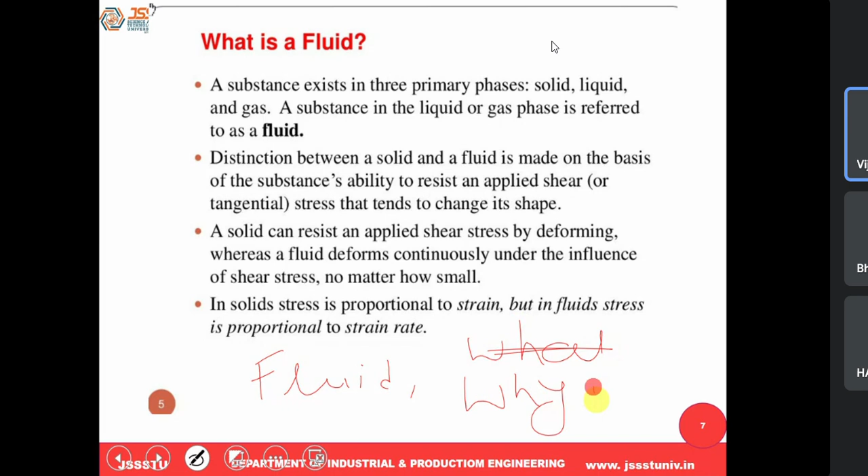The important questions: first, what is a fluid? And another very important interview question: why does fluid flow? To answer, let me take the answer from your side. Anyone, what is fluid?

Liquid and gas together, okay. But technically, you should answer like this: one which is having flow property is called a fluid. Whatever has movement, we call it fluid. This is the technically correct way you have to answer in an interview — one which has flow property, which is able to flow, that is called a fluid.

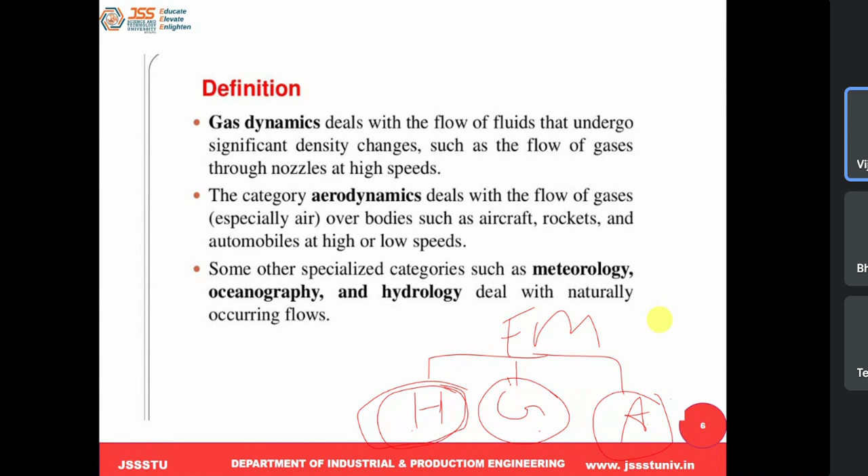Fluid means not only liquid, it also includes gas. We know every matter on earth is made up of three things: solid, liquid, and gas. The study of solid behavior is the subject called SOM, and the study of liquid as well as gas behavior is called the subject of fluid mechanics.

Now we are going to take this up in fluid mechanics — not only liquid, we are also going to consider gas. That is the thing now. We got to know what is fluid, one which has flow property. Then, why does it flow?

That is also one of the indirect reasons, but I'm not considering that. Gravitational pullback, is that the main reason? No, the gravitational effect will not cause that flowing action.

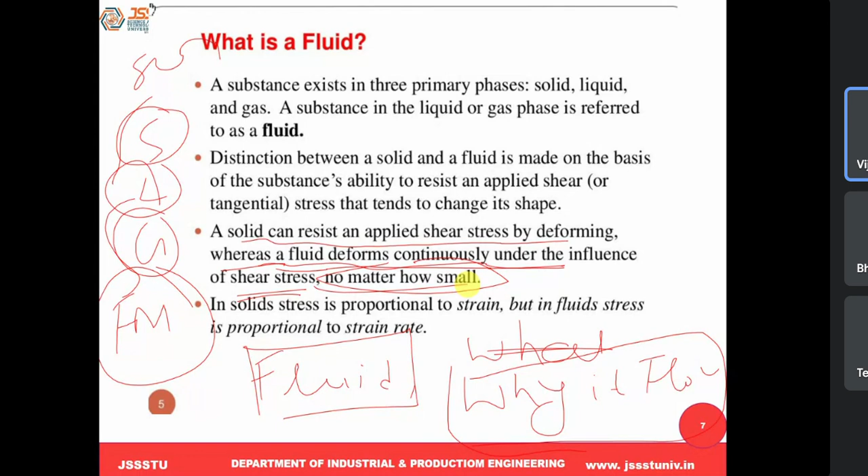The answer for the question of why fluid flows and why solid cannot flow means: solid can resist that shear force, but here it doesn't happen like this, because the fluid deforms continuously under the influence of shear stress no matter how small. It will never resist an applied shear stress or applied shear force. That is the reason why fluid takes up a flowing action.

This is what - even you can take a rubber, imagine a very thin, delicate rubber. If you apply force on this, take two bodies, apply the rubber here, apply force on the top body moving, definitely there will be a shear force developed here. When you apply the force, because this is a very thin rubber, the resistance force is very small and shear stress is also very small, because of that it flows like a fluid or kind of thing, isn't it?

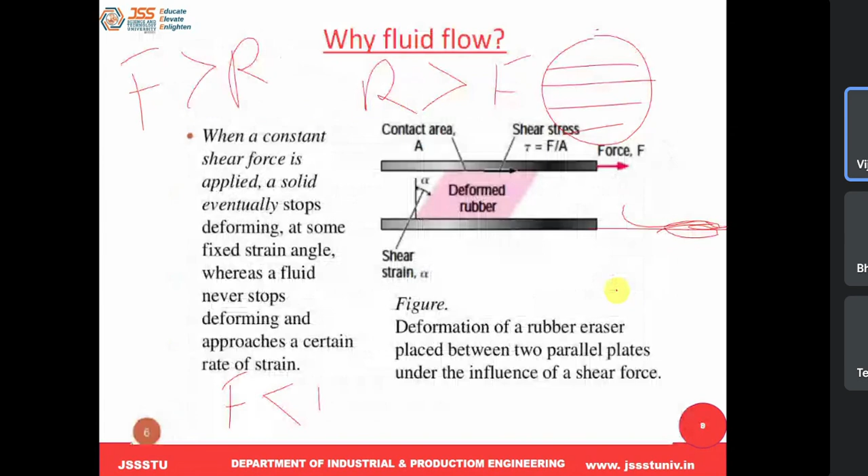Liquid is anything which does not have a definite shape, whichever container you fill it in, it can take the shape of that. Suppose if I put it in a container, it can be done, but the thing is liquid occupies less space than gas, because gas will expand.

Also in the liquid case, cohesive forces are more, whereas in gas, cohesive forces are less. So what is the difference between gas and liquid then? These are basic things you know.

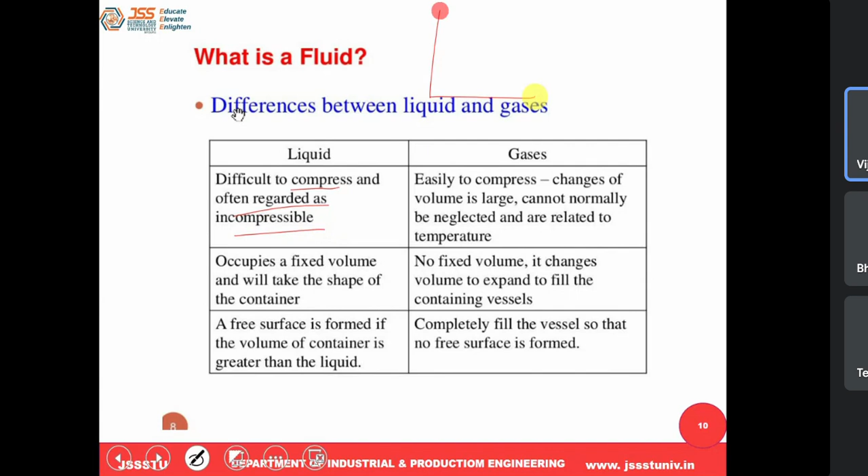Difficult to compress, regarded as incompressible. If the fluid is incompressible, what is incompressible? I'll answer in the next session. So liquid is difficult to compress, but gas can easily compress. If it can easily compress, that means I can easily reduce the volume, so change in volume can be done easily.

Liquid can occupy a fixed amount of volume, whereas gas is not going to occupy a fixed amount of volume, because it tries to expand itself. You can take an example: I put liquid in a beaker, it takes a definite volume here. But what is happening with gas? It's coming out, it's not fixed.

That is the thing. If the volume of the container is greater than the liquid, a free surface is formed. The volume of the container is greater than the liquid, so a completely filled vessel has no free surface formed.

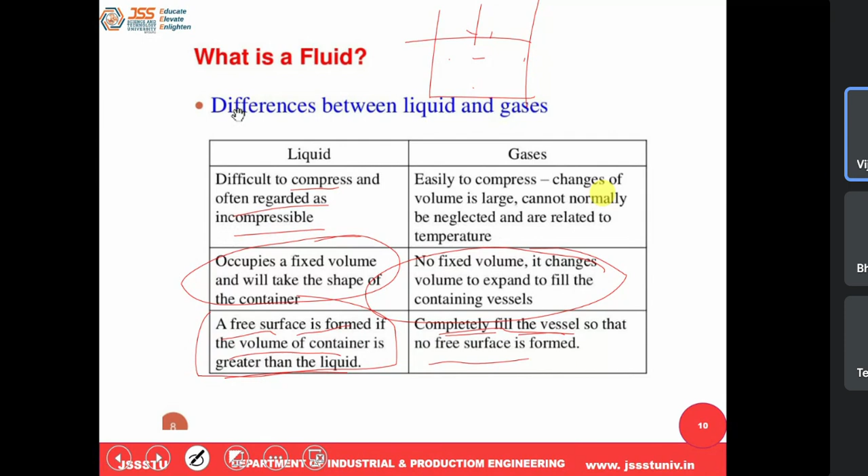Okay, what is the area of application? There are many things, like we are going to use Fluid Mechanics in turbo machinery, to design turbine, fan, blower, like in military we are going to use it for missiles. When you're going to design a missile, this subject is important. Aircraft, ship, all those.

In automobile, it is required. In the medical field also, we are going to use it, like our body is made up of what? Inside the body there is a fluid, right? What is that called as? Blood. So therefore, to monitor how the heart pumps that fluid, our blood is pumped through the veins as well as mainly through the heart.

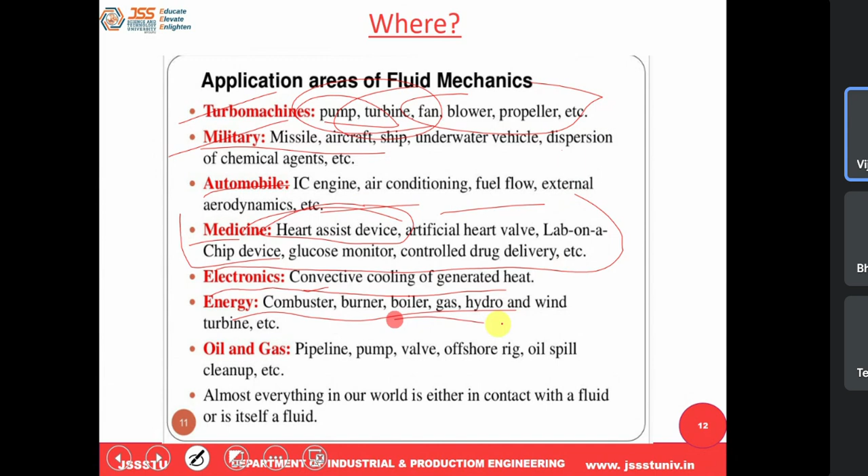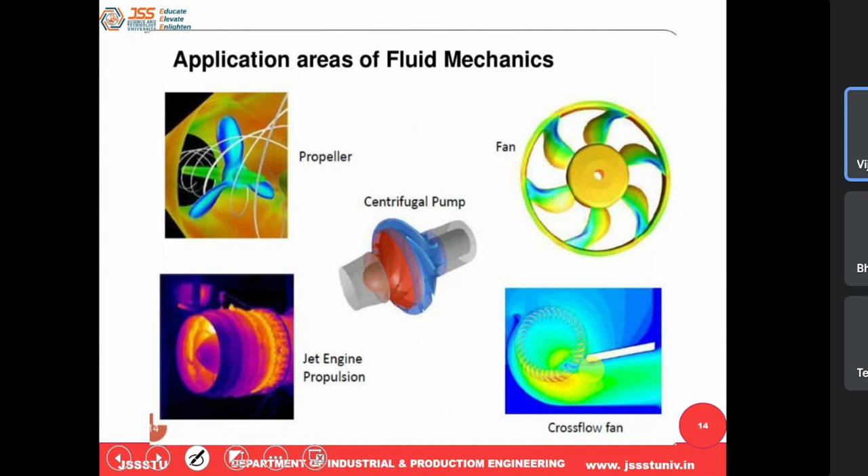So further to study that, this fluid is important, obviously fluid mechanics, then electronics for cooling purpose, in energy like boiler, gas, all these things are required. So there are many applications. This fluid mechanics is huge. Wherever we interact with air or with fluid, fluid mechanics comes into the picture. So these are some of the application examples.

Okay, this is a small introduction about fluid mechanics, types of fluid mechanics which come under that. Then we deal with what is fluid and why fluid is going to flow.

Okay, let me take you to the next important thing, which is we always need to understand properties first. Like how in a material we understand the properties of materials, same way fluid is also having some properties. If you know the property, then we can play a role in that property to design according to that. So therefore this property should be known. So same thing here, we are going to learn some properties now.

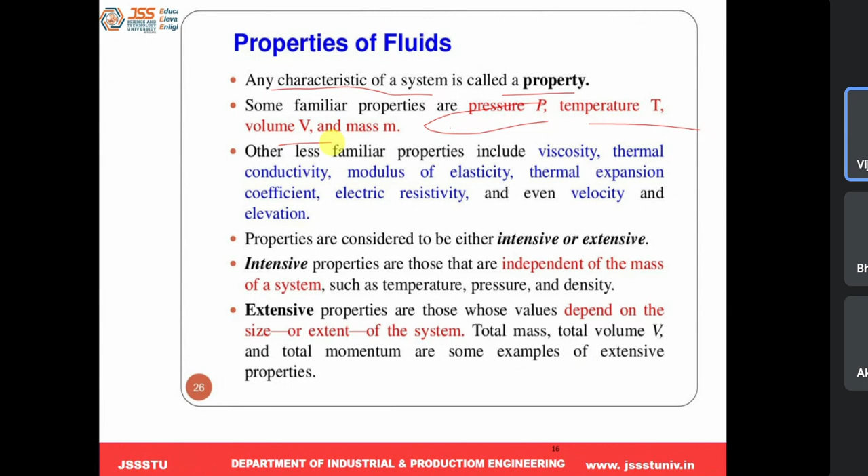So this property, any characteristic of a system is called property. Mainly these are the properties we are going to deal with. It may be mass, pressure and all. So here we are going to take up the very important properties, called density, vapor pressure, surface tension, specific gravity, cohesion, capillarity, viscosity, adhesion, compressibility. So these are some important properties.

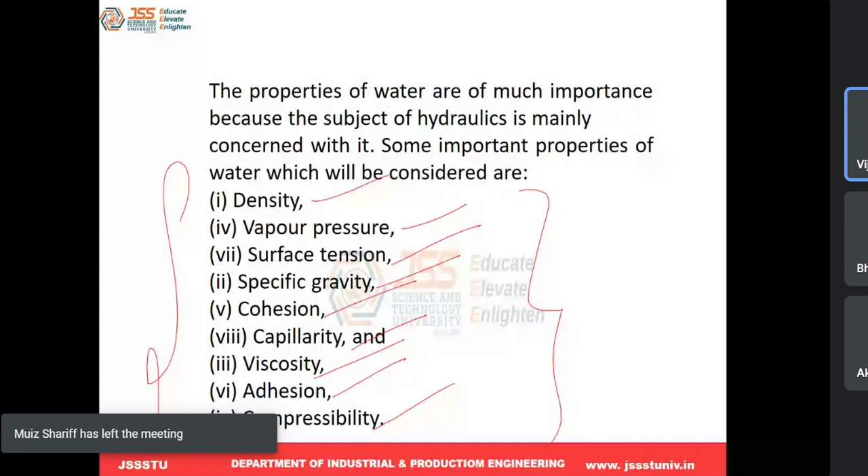We're going to take up one by one. These are important questions that will be there. So let's start with the first very important property, called mass density, or it's called density. So basically density means mass density only, but there is one more density called weight density. So these two come under density. Let me start with mass density.

I think all of you know this well. Anyone, what is mass density according to the definition? What does mass density mean? It is the ratio of mass of the fluid to the volume of the fluid.

Mass per unit volume, or in other words, mass per unit volume is called density, or it's also called mass density. So what is the SI unit? Mass usually in kg, volume either in meter cube or mm cube, that is kg per meter cube. This is the SI unit.

So basically we are going to use very standard liquids. We call them standard liquids in the entire FM. One standard fluid is called water, H2O. Then another standard fluid we consider is air. And one more we consider is mercury.

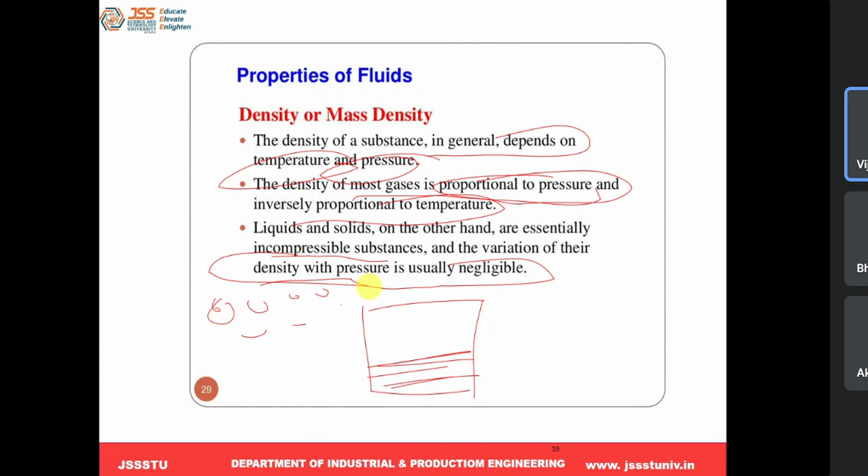Okay, we got to know what is mass density. There is one more density called weight density. What exactly does weight density mean? It is the weight of the fluid acting per unit volume of the fluid. So weight usually is measured in Newton, the SI unit. Volume of the fluid could be meter cube or mm cube. So what is the unit of weight density become now? Newton per meter cube. There is a question they will ask you: what is the relation between weight density and mass density? You should find that now. Weight density we know is weight per unit volume. So what is weight?

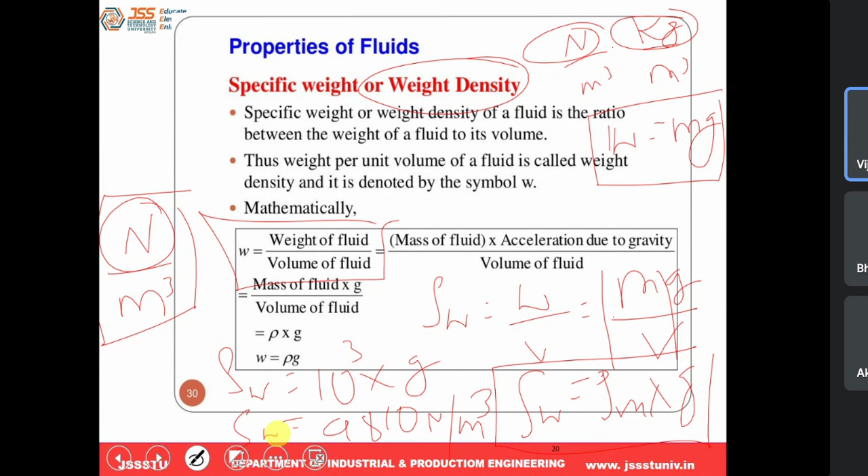You got it? All of you got it?

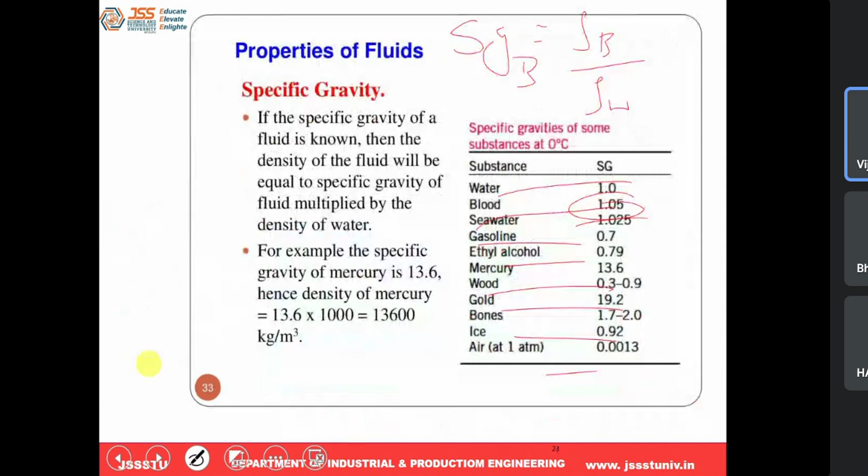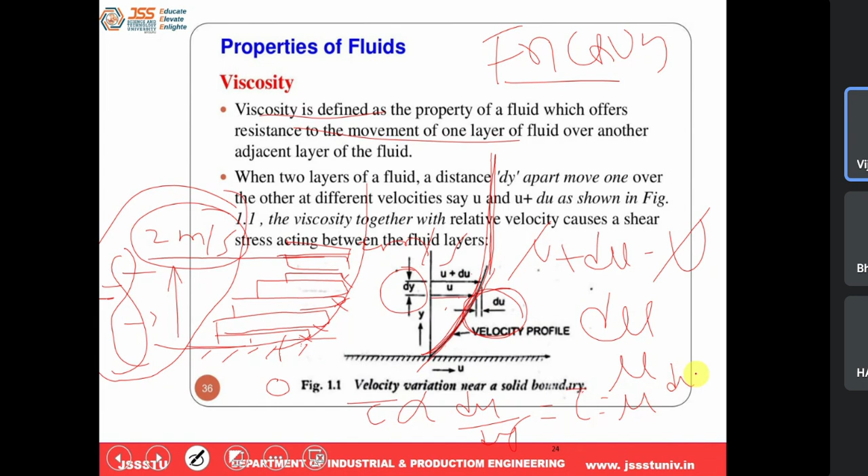That constant is called mu. It is nothing but viscosity. Therefore tau equals mu into du by dy, or mu equals tau by velocity gradient du by dy. This analysis was done by Newton. So fluids which follow this law are said to obey Newton's law. This is called Newton's law of viscosity.

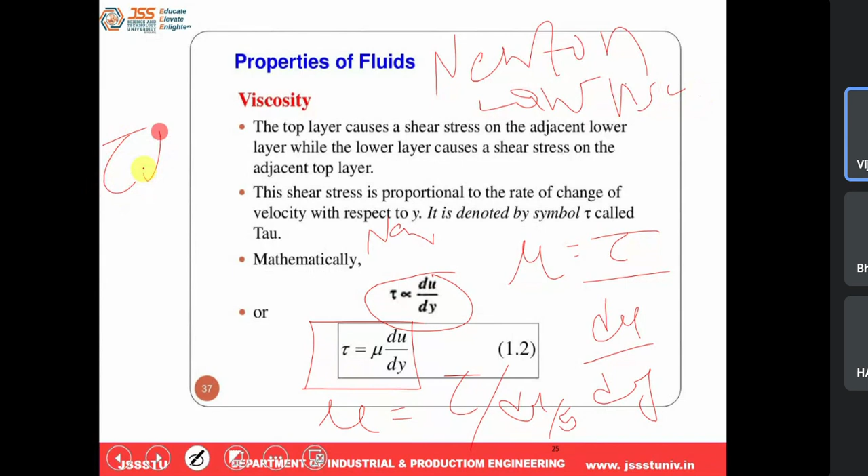They may ask you, what is Newton's law of viscosity? Newton's law of viscosity states that shear stress is directly proportional to velocity gradient, or we can call it shear gradient. So fluid which obeys this law follows Newton's law of viscosity.

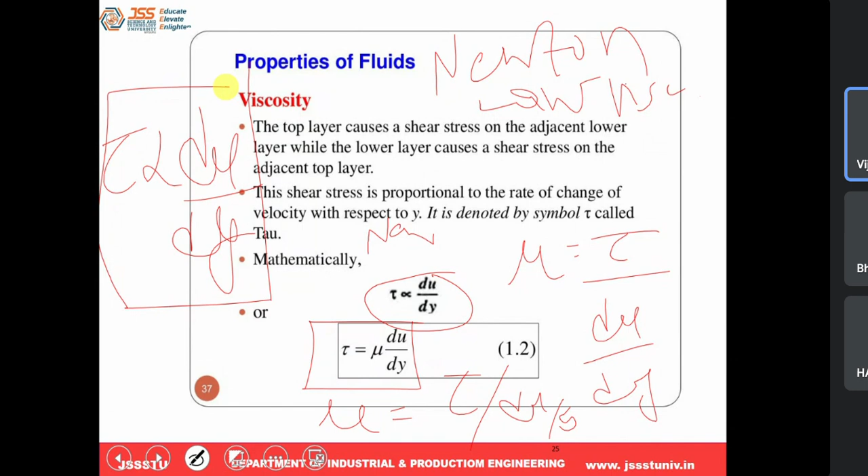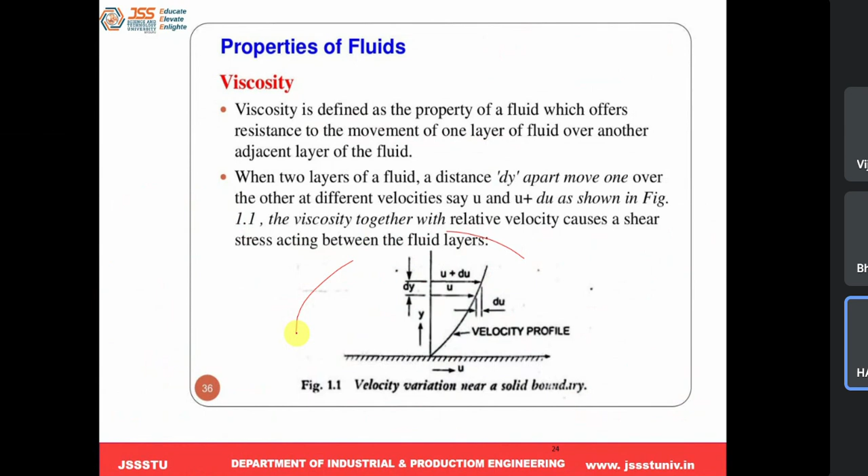Okay, now let's come to the unit of viscosity. I think you have already dealt with this in your HP subject, mu comes, units come. So what are the units now? SI unit - what is that unit? Newton second per meter square. That is the unit of viscosity.

Okay, in viscosity there are two types. One is dynamic viscosity and another is kinematic viscosity. Dynamic viscosity is nothing but mu, also simply called viscosity. Kinematic viscosity is the ratio of viscosity of the fluid to the density of that fluid - mu by rho. What is the unit? SI unit is meter square per second.

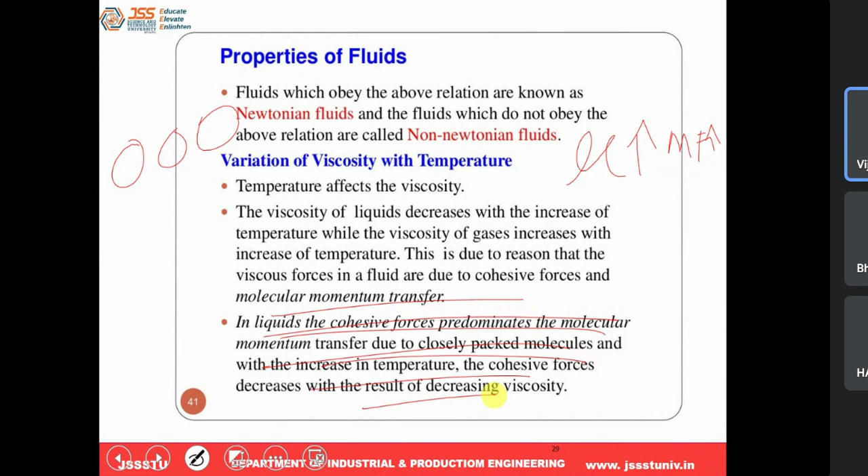Got it, all of you? Got it? Yes sir. This is a very, very important point in the place of viscosity. Keep this in mind. Okay, let's come to the next types of fluid.

This is important. So in types of fluid, there are 4 different types - Newtonian fluid, non-Newtonian fluid, plastic fluid, ideal plastic fluid. Newtonian fluid means one which will follow Newton's law of viscosity.

What is Newton's law of viscosity? Tau is directly proportional to du by dy, the velocity gradient. The fluid which follows this law is called Newtonian fluid. One fluid which will not follow this law is called non-Newtonian fluid.

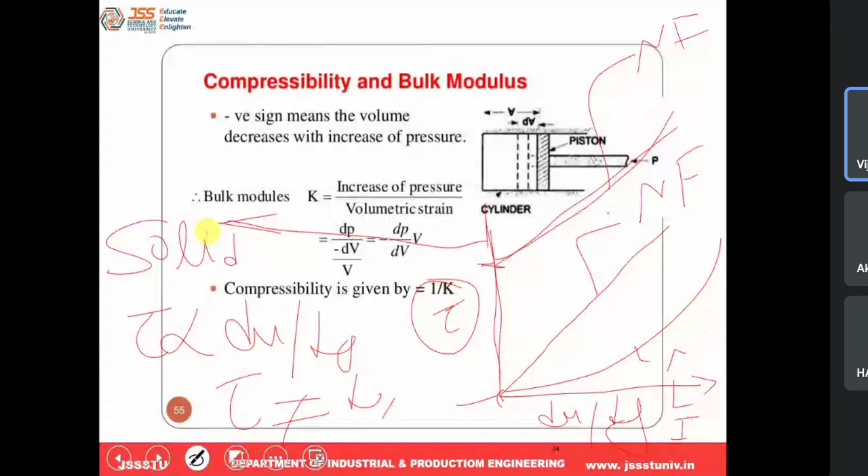All of you getting my point? Is it clear? Yes sir. Hello?

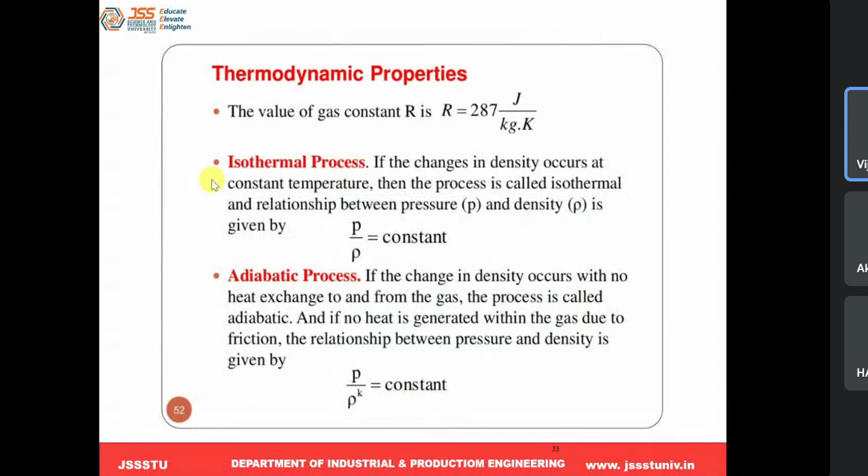Members. Okay. And this is not required. Okay.

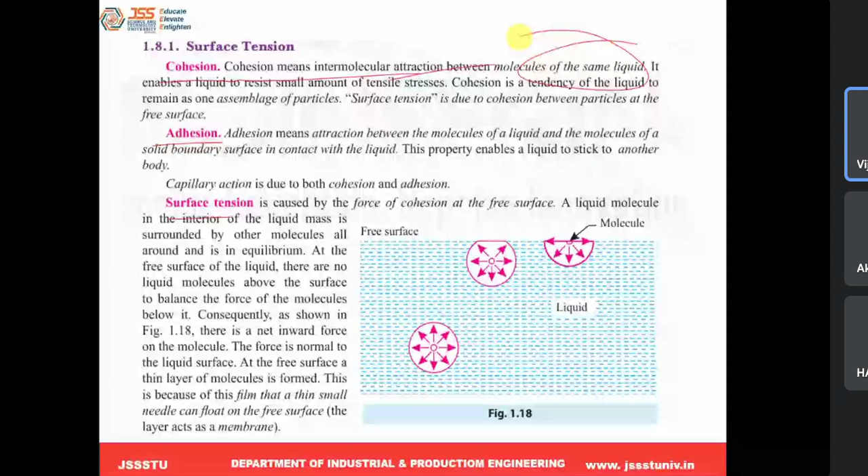So cohesion means this is one more property, we know, molecular attraction between the same liquid. Adhesion means attraction between the molecules of liquid along with the solid boundary.

So there is a question, okay? Suppose there are two liquids, one is water and one is mercury. Can you tell me which will wet the surface, water or mercury? Water. Why will not mercury?

The reason why it will wet the surface is because water has more adhesion property. The molecular attraction force between the solid surface and the liquid exists for both, therefore it will wet the surface.

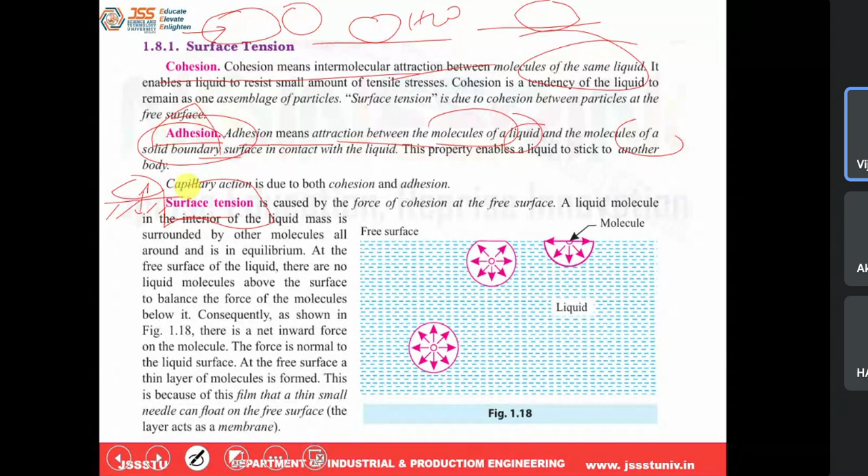So these are very important things in fluids, this comes under surface tension. So what is the surface tension? If you take a free surface on water, always on the free surface there is a force acting, called surface tension. What is exactly surface tension? Anyone having any idea?

Okay, on the surface of water, you can see there are three liquid molecules we consider here. One is exactly inside, one is almost 75% inside and 25% outside, and one is exactly at the surface.

So what happens in this liquid now? Here the molecular force acts equal in all directions, this is under equilibrium. Whereas here, at the bottom and sides the molecular force is more, but at the top surface it is less. Why? Because here there is no liquid above. So therefore it is not under balanced equilibrium.

But exactly what happens here we can see. The molecular force on the top surface has nothing above, but the other half is equally distributed. Now because of this, what will happen? The same liquid, if you consider the exact top surface, the force is acting in tension in all directions.

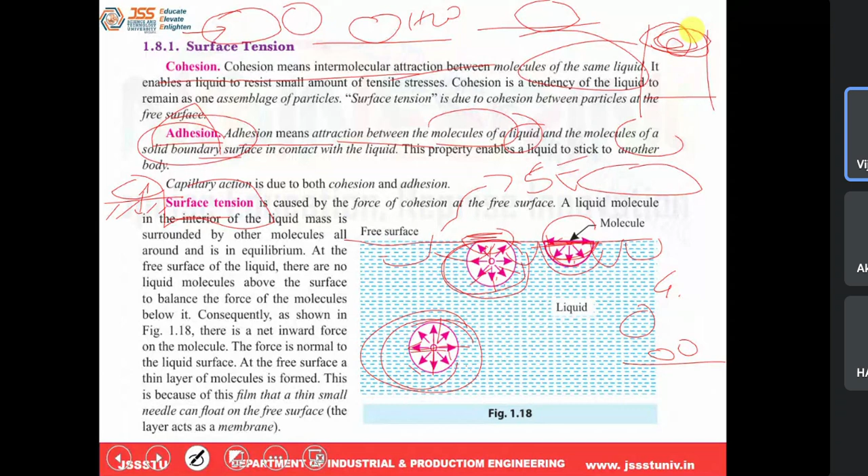Okay, next is capillarity. I think you know this capillarity. The rising of this is a phenomena of rising or falling of the fluid in a small tube, called capillarity. So why does it happen?

Because of two reasons, one thing is cohesion and adhesion due to that. But some liquid will rise, some liquid will fall. In which liquid does it rise? Usually in which liquid does it rise? Mercury? No, it is water.

But in mercury it will not rise, it will fall. It will fall. And on the top surface of this,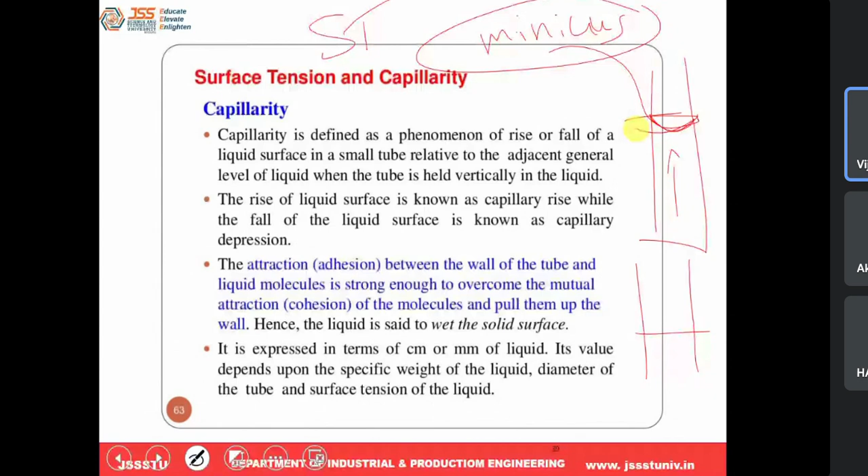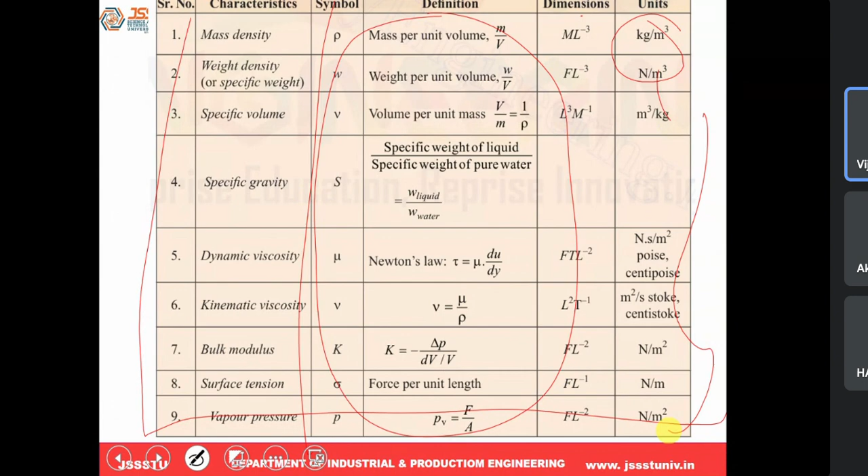That's all. And summary of this, all these things will be here, their symbol or notation along with the definition or equations along with the units, SI unit. This table is a summary of that. Okay, this completes the properties of the fluid. I think that's all enough.